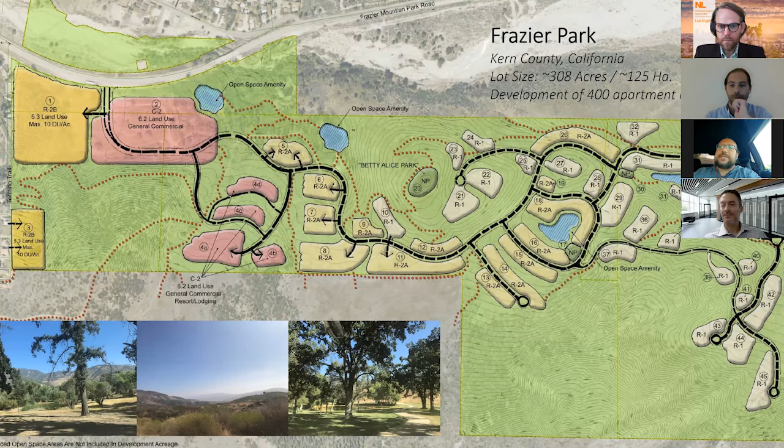There is also, if you talk about air, do you really mean the entire area of this plot of land to measure air quality, or is it more inside the buildings? Both area and building. The idea is to create a place we probably hadn't thought about, to really have the maximum data coming from this place. Even the behavior of the people who are living there, maybe not in their own house. We can see how far they accept to give us that data, but in the building, in the hotel, we can have an understanding of the information and data from those sensors once they come into place.

That's good. I might connect you to a Dutch company that normally focuses on cities, and they have far more detailed information about air quality, which helps cities make better decisions. But you're almost building a village here, so maybe this is also interesting to connect. Interesting, because what takes long to make is the software that harvests that data. So if a company already has one and has been working on something that actually works and has experience, that's a lot of time gained. This is why we are really open to that.

Yeah, and you're very multidisciplinary, that's why I feel so. You have your R&D, you do project development, you are investing in property. So it's easy to talk to you because you can quickly make a connection. And also to the Dutch participant, and the other two groups, this is all very good, very positive vibe.

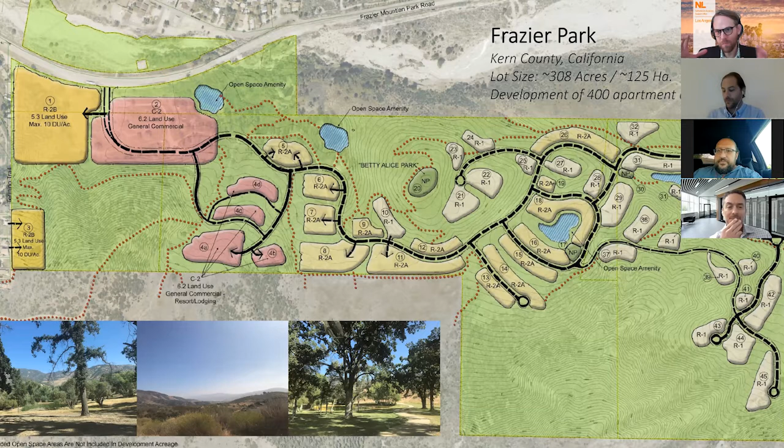I talked to Mark, who's also from Hydroloop involved in the water cluster. We talked to the LADWP, Metropolitan Water District, LA Sanitation, and that went very well. We found that the Netherlands is doing interesting stuff there too. I felt when I talked to you, Angelo, you think very big, and Hydroloop also thinks very big—they want to have a big impact. I said you really have to come, Mark, because I feel there are like-minded people here, and I'm very happy you guys met in this breakout.

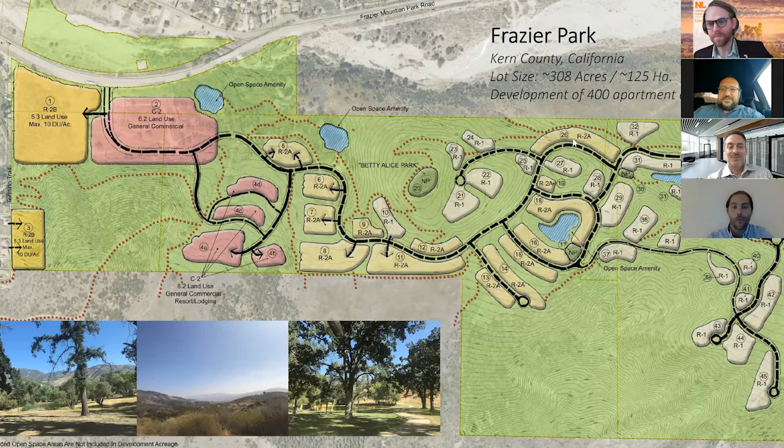Very grateful for the opportunity here, and I definitely will be down there and make it happen. We need these projects because, as you say, people can talk about it and want it, but there's a difference between talking and really making it happen. It's the way we've got to change the world. You can keep talking about technologies and what can be done and get stuck in conversations with no action, so you've got to push the envelope.

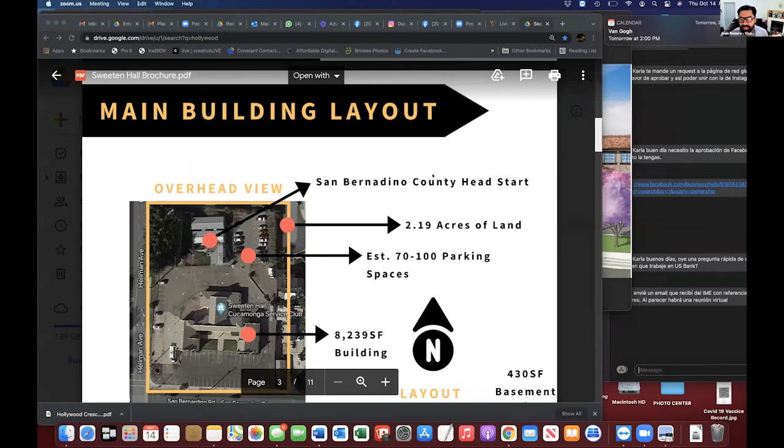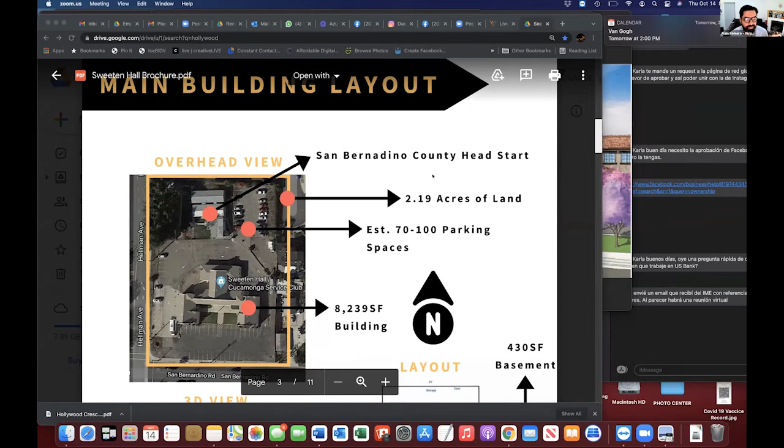Thank you. Karla, I think this time around, if we can start with the PowerPoint, that way we can just go through that. I have requested the architecturals be sent. But essentially, welcome everyone. What we're looking at here is a 1940s structure that was used as a service club, but it was originally built as a school. Karla, can you stay within the top part where we were at initially? Thank you, right there. As you can see, on the upper part of the visual there, those are temporary buildings. The County of San Bernardino is our tenant there currently.

They have a Head Start, which is a schooling facility. In the existing building, which is the lower part of the picture, we've determined that this is a historic building given by a study. So that structure will remain the way it is. What we are envisioning here is to have an assisted living memory care facility in the back acre. So the facility will wrap around the existing building, if you will.

Roughly, it'll be a 2-level building that will match the character of the existing architecture, with about 80 rooms given the code for this type of use. So there will be 80 assisted living facility memory care rooms built in the back. The existing building will then become a common area facility—food hall, administrative, and such. That's what we've planned for this building.

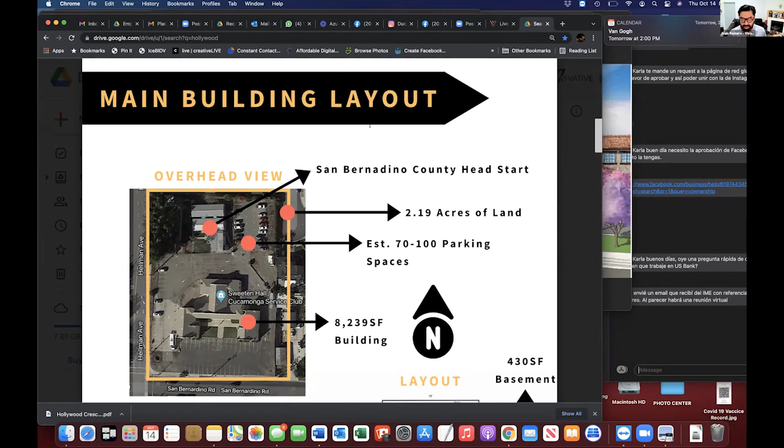Okay, Karla, can you scroll down please? Thank you. There you have a little bit of a better visual of the building. As I was mentioning, it's a colonial revival style type of building, and there you have the existing floor plan. This building will remain as part of the project.

Currently, what we've done to stabilize the project while we continue with the planning is the county is our tenant in the back, and we are bringing in a tenant in the front that will be a school. Projects here take a few years for planning, so both tenants know that eventually when we're ready to break ground, we will be relocating them. But in the meantime, they are there and they're helping us keep the lights on, if you will.

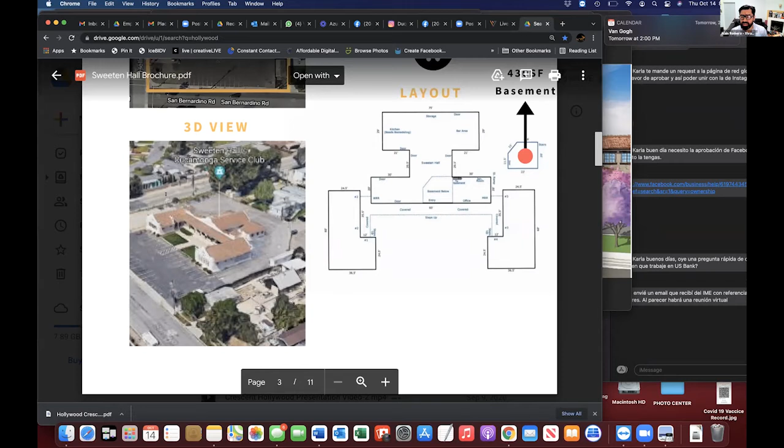We do have some architectural, more conceptual renderings that were mainly designed to have a feel for the massing, for what is possible given the code, to get a feel for what we're envisioning. They serve as a step before we can say this is what we're going with, because the next step is to have discussions with the local community to make sure everyone is okay with what we're thinking—not only the city, but also the local inhabitants of the town. So that's what some of the architectural renderings we've completed are.

So having said that, I don't have a lot of technical information on this project because of the phase that it's in, but I'd be happy to know if there's any interest on your part in learning more, receiving more specifics about the project, and also learning a little more about what your interest would be. So I can open it up for discussion.

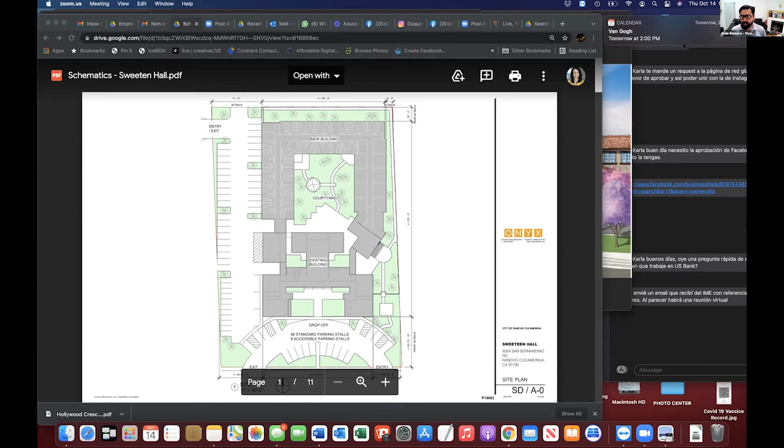Alain, do you maybe have a website or something that you keep updating with new content on the status of the project? Yes, so Carla will put our main website, which is our company website. There you will be able to see not only projects that we have, but past projects too. It's never as updated as we would like it to be, but it'll serve an initial purpose. If anything springs from there, please definitely reach out to us through Carla. I think Carla is going to be our point person.

Something I wanted to mention right now: Alan spoke about the Alta Loma packing house that we didn't include in the presentation. I think adding the benefits of sustainable building is going to help us through the process with the entitlements and getting support from the city and the neighbors. In the city of Rancho Cucamonga, which is where the Sweeten Hall is, we also have the other property that we keep bringing to light but not really sharing fully. As you go into our website, you'll see that project there, and now you'll have a little background of relatedness. Right now we took that one off the shelf as we're creating a joint venture. We didn't even know that's the way it was going to come about. We can talk more about that at a different time.

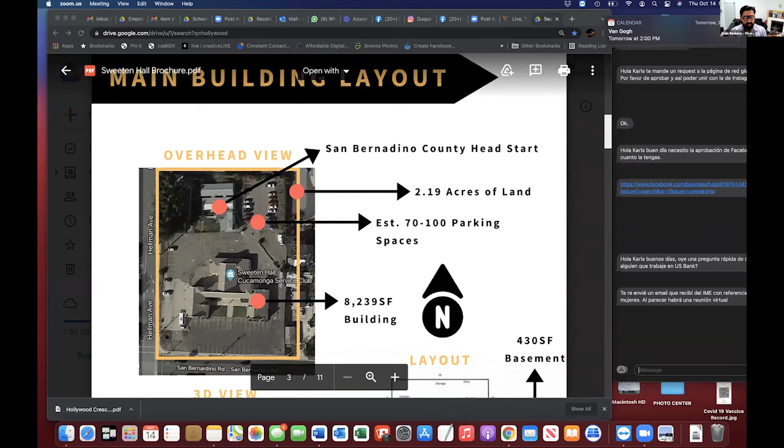This is a 2-acre site that we acquired. The building that sits there, an 8,239 square foot building, is a 1940s building, originally built to serve as a school. The lower part there, you can see the Sweeten Hall. Later in its lifetime it became a service club, sort of like a community facility, and when we bought it, it was being used as a community facility. The buildings you see in the back, in the parking lot, in the upper part of the image, are temporary facility buildings owned by the county of San Bernardino. They are our tenant, and they run a school there.

And so in the main building, what we've done so far, we did a study of the structure, and it is a historic structure, which will remain because of its historic nature. And what we did is we brought the building back to its original state as much as we could.

And we are housing a school there. So currently the property houses 2 schools, one in the existing building and one in the temporary facilities in the back, which is something we're finalizing.

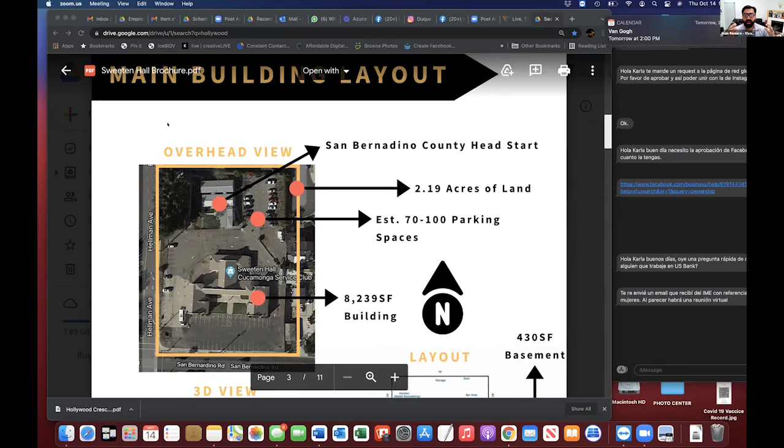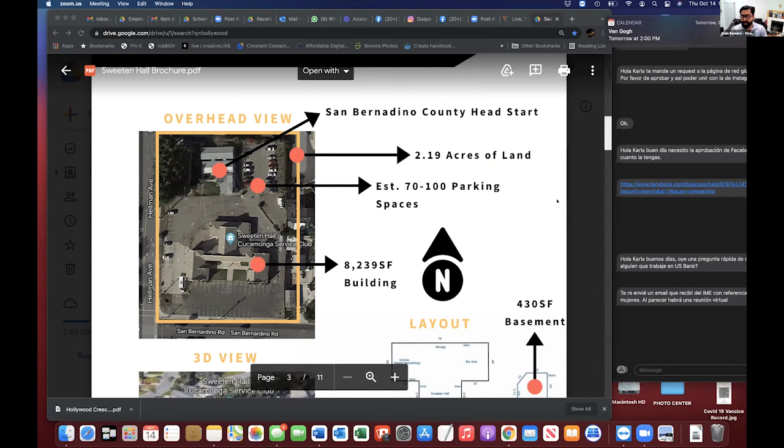What we envision for this property is the main building becoming a common area facility, food hall, administrative, right? And in the back is going to be roughly about 80 rooms, assisted living and memory care facility. So a building of that nature should have the latest and greatest technology, because it's going to be medical, it's going to be senior folks living there, so we want to keep them safe and well protected.

So as you can see, that is a bad image, but it is an image of a profile of what the existing building looks like. And to the right, we have a little bit of a floor plan. So as you can see, there are 3 distinct structures that make up the Sweeten Hall.

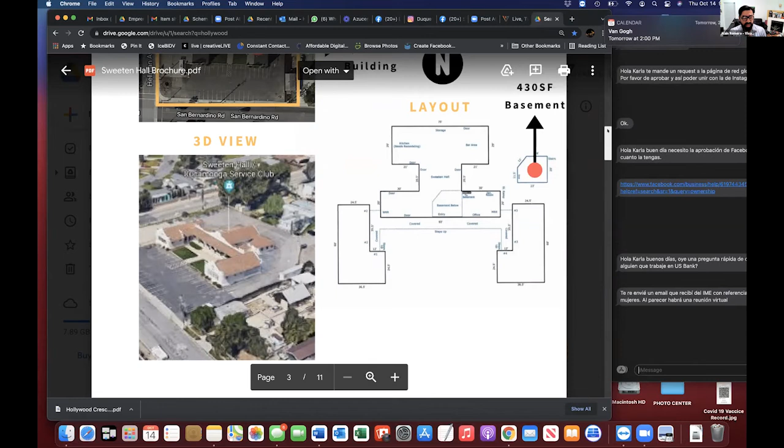This is an iconic facility in the city of Rancho. Everybody knows the Sweeten Hall. If you didn't go to school there, you used to go play there at some point, because it was a community center. So it's very much embedded in the history of the city.

And because of that, what we are envisioning right now has to run through not only the city, but also the community. So we did create some conceptuals. And I think, Carla, if we could jump into the other image that I recently shared with you, that will give you a very rough idea of what we are envisioning.

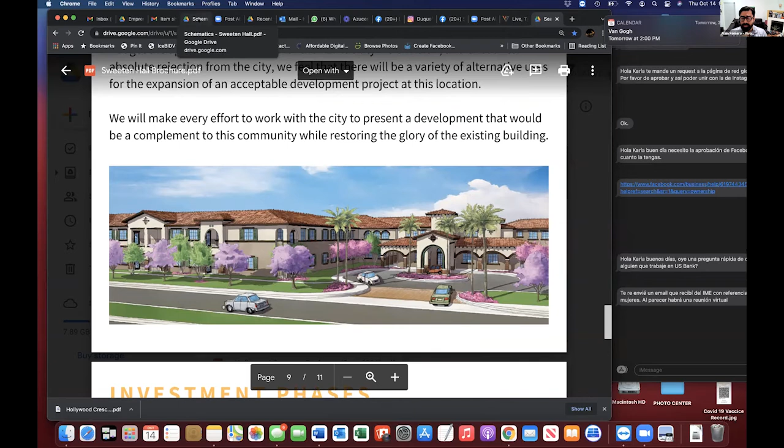So what we have is the existing building there in gray in the lower part. And then in the back, roughly per code, what will turn out to be are 80 rooms for assisted and memory care. And in the center there, you have a courtyard and some green spaces around it.

In the upper left, you'll have entry for more like service, people that come to service the building. The main drop off and reception area is in the lower part of the image, which is kind of like that roundabout, which has an entry and an exit roundabout structure there. That's where people come in to visit their family.

Right now, before we set our heart on a direction for this project, the next step for us, once we get our tenants settled in, is going to be for us to share these conceptuals with the nearby community. We're going to be having some meetings for them to see what the future holds for this facility.

The tenants there already know. We already have a contract with them such that when we are ready to break ground, we will be relocating them to a different place. So this is all part of a greater plan.

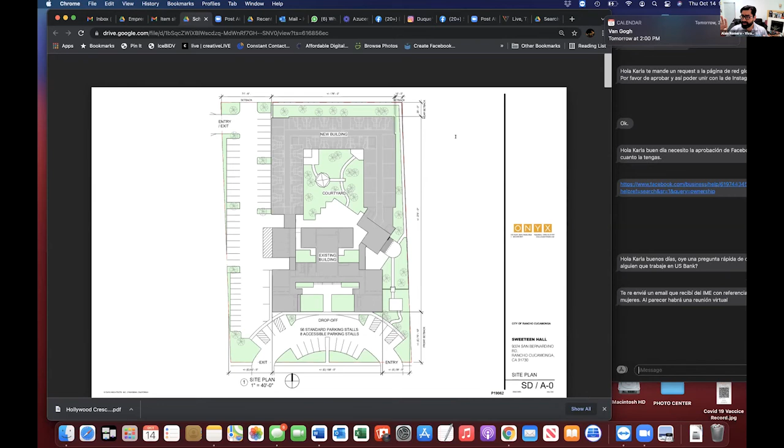So yeah, that's it. And maybe before I open it up, as I've been doing in the previous two sessions for everyone, maybe Carla, we're going to do it a little differently now. Maybe Carla wants to share with you something about the project. Typically, she answers questions all the way at the back of the session. But is there anything you'd like to add at this time, Carla?

Well, it's again navigating with the city and getting permits and entitlements done. It takes time here in LA. I don't know how it works in the Netherlands, but I think bringing all the benefits of having a sustainable, circular facility will definitely help move the project forward, and see the support from the neighborhood and the city, and also maybe look into some grant money and support, or tax credits from

utilizing all these green technologies. So not only looking at the cost and efficiency for the building, but also all the benefits that will bring for elderly people. We talked earlier about the green roofs and gardens and vertical gardens and all that can bring a lot of benefits for the health of the people living there, which they will be most of the time, staying there.

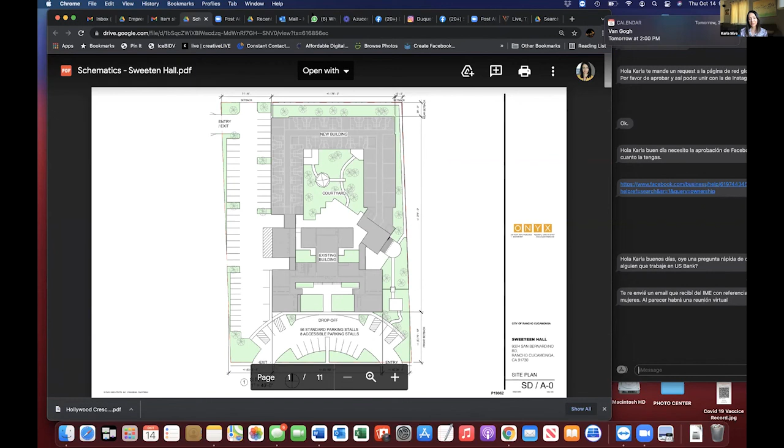Thank you. Thank you. I think everybody's coming back again.

Good to hear that changing the systems is the hot topic. Yes, it is. It was the last thing I heard coming back into the room, but that's actually what it is in order to be sustainable, right?

Yes, absolutely. And for the general group, since we've been adopted in a way by the city of Rancho, we're now working on two of their historic, iconic buildings. One thing Karla mentioned that's important to keep in mind is that the city of Rancho will have that metro stop going from LA to Rancho and then to Las Vegas. That's great connectivity for the city, and it will definitely help our projects.